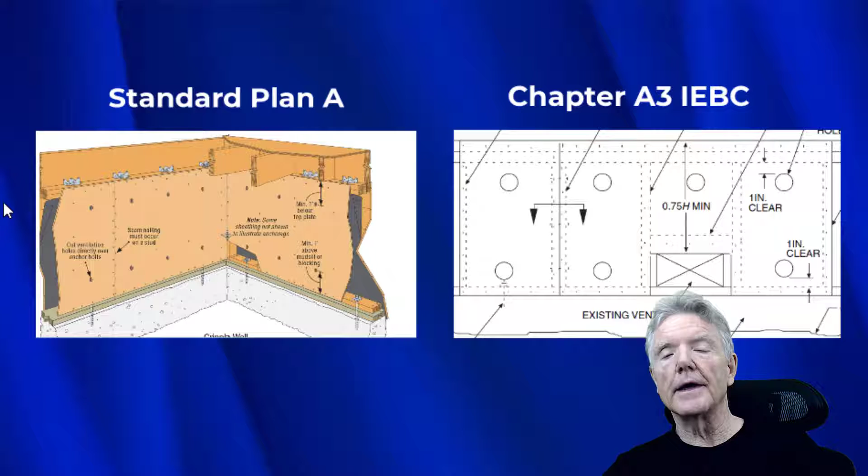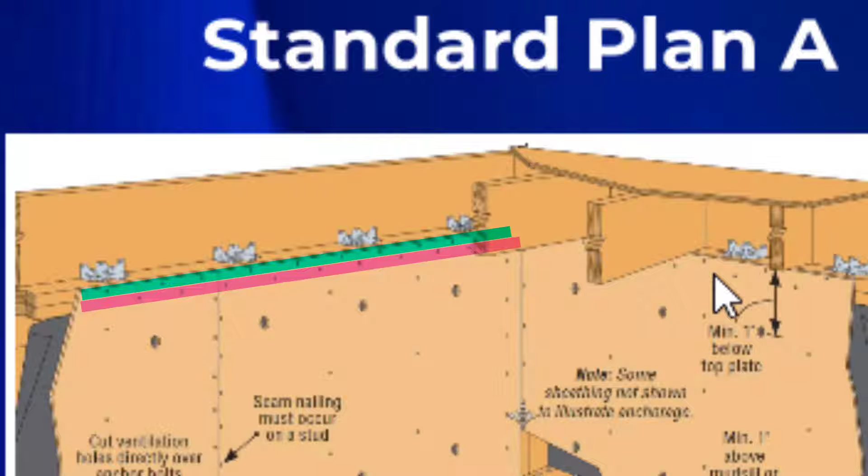This first way to do it, we see here in Standard Plan A. Here at the nails, we have nails up at the top, and we also have nails down at the bottom, all the way along the plywood. You see the nailing of the upper top plate and the lower top plate all along here. We see this in a few different guidelines, and we're going to look at every one of those in the rest of this video.

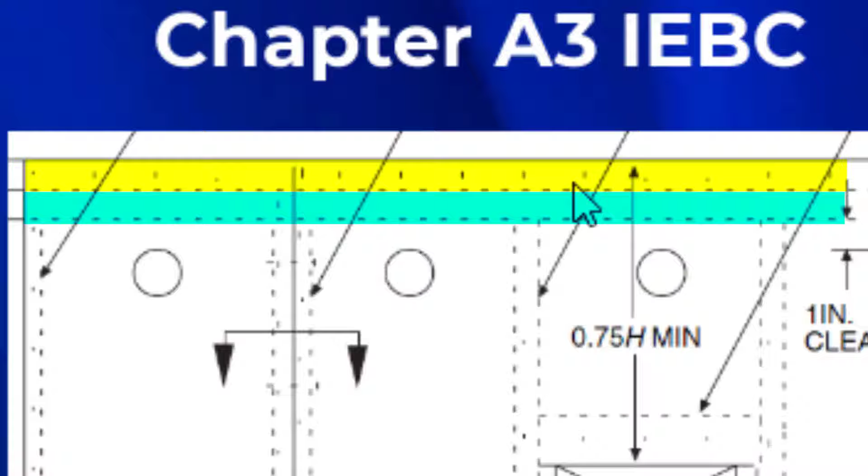Now here's another way to do it. This is from Chapter A3 of the International Existing Building Code. You see right here, there's nails in the upper top plate only. This section here is the lower top plate at the bottom, and this is the upper top plate. So there's absolutely no nails in the lower top plate. We're going to look at both ways of doing it and see which one is best.

Right now we're going to look at every single building code and seismic retrofit guideline until December of 2020, which is right now. So everything published before now, we're going to be looking at this particular connection, the plywood to top plate connection.

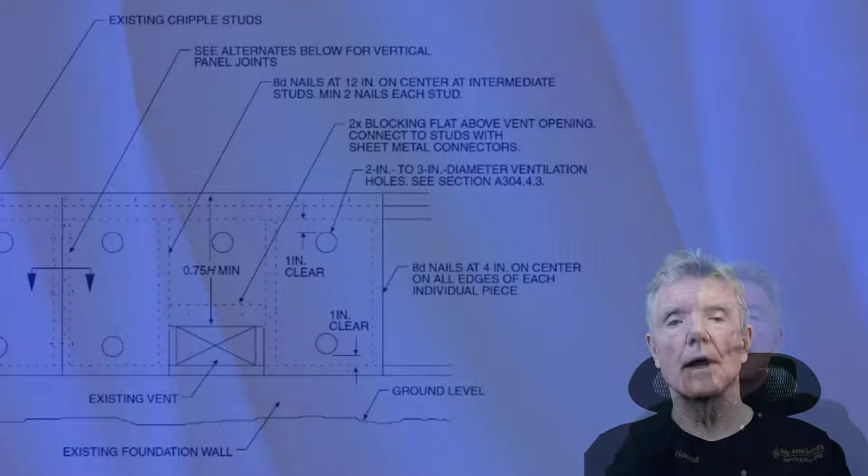This is the first instance I'm aware of where there was a construction detail that showed nailing of plywood in an official document. This comes from the Guidelines for the Seismic Retrofit of Existing Buildings, published, I believe, by the Structural Engineers Association of Southern California in the early 90s, quite some time ago. I was given a copy when I went there for a seminar in the mid-90s.

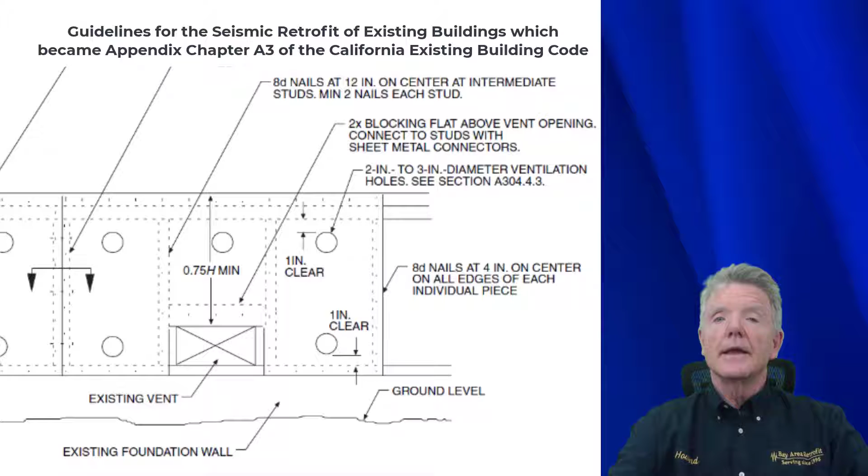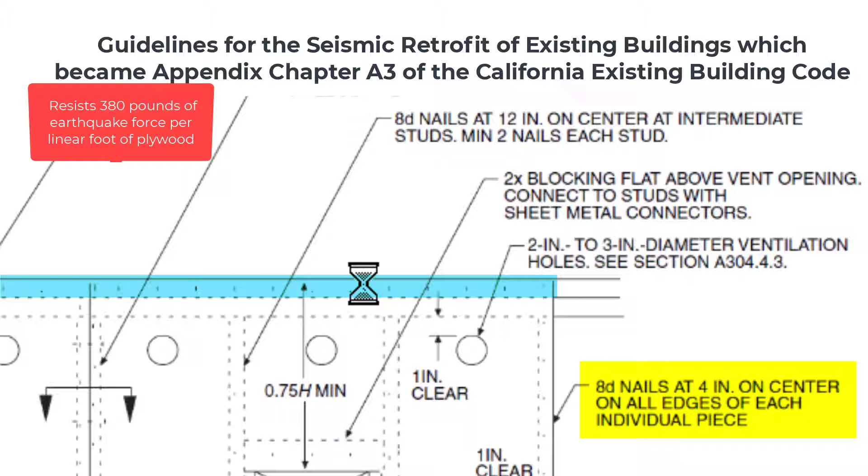The main thing here is we see 8 penny nails, 4 inches on center on the edges of each individual piece. So each piece of plywood will be nailed like this. The really critical thing to know is this edge nailing right here. You see these little dots - a dot here, a dot here, a dot here - all those little dots represent edge nailing onto the plywood.

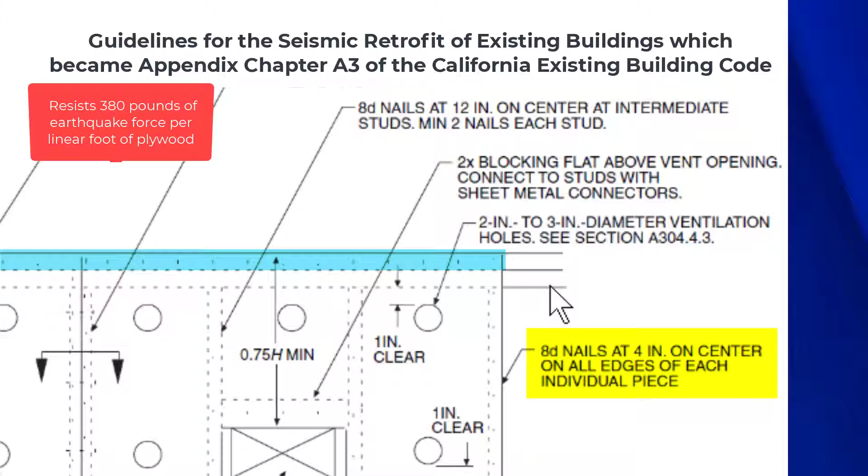That's the edge of the plywood, just like it says: all edges of each individual piece of plywood. Now there's two top plates here - there's the upper top plate right here, and then there's a lower top plate right here, and all the nails go into the upper top plate.

This is from the 2015 Special Design Provisions for Wind and Seismic, an American Wood Council publication, and it is a part of the building code for the entire country. So anything that applies here applies to all new construction. This is the basis of new construction in the building code.

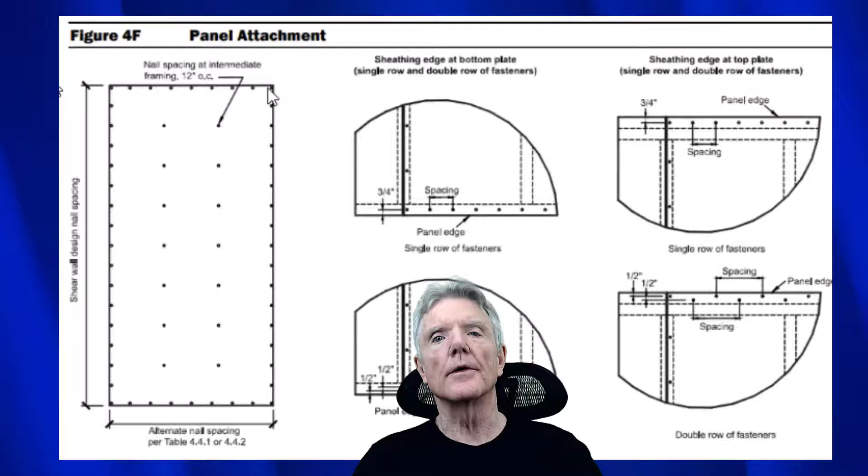Let me show you what it tells us here. So here we have the nailing along all the edges, just like we saw a little while ago. Here at the bottom, we also see the nailing at the bottom - it's spaced 6 inches apart, 4 inches apart, whatever. Main thing is it's here at the bottom. And then when you come over here, you have nailing again at the upper top plate. Remember, this is the lower top plate, this is the upper top plate.

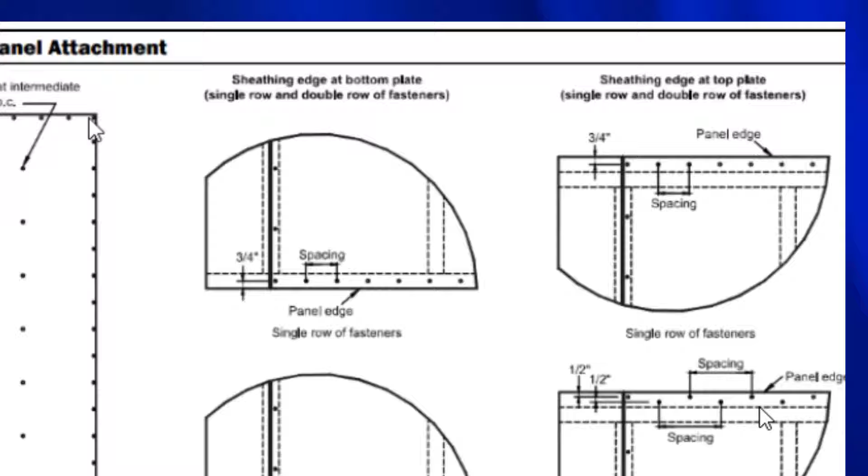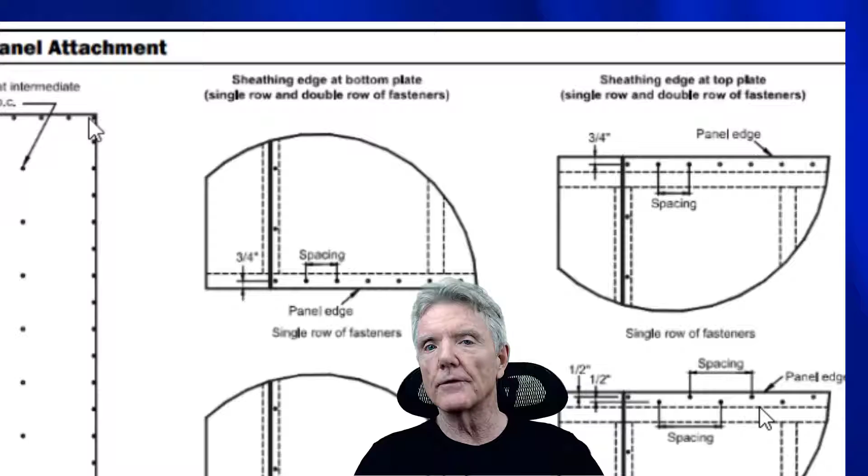Now, if you want to stagger the nails, that's fine too. You can go into the upper top plate - here's a nail here, here's a nail here, here's a nail here - and those can be spaced, let's say, 4 inches on center. But you can't put it here. So you can't come here and put one in, 4 inches over here and put one in, 4 inches up here and put one in. That is the way Standard Plan A and some other guidelines do it, and it is in contradiction to what is in the Special Design Provisions for Wind and Seismic.

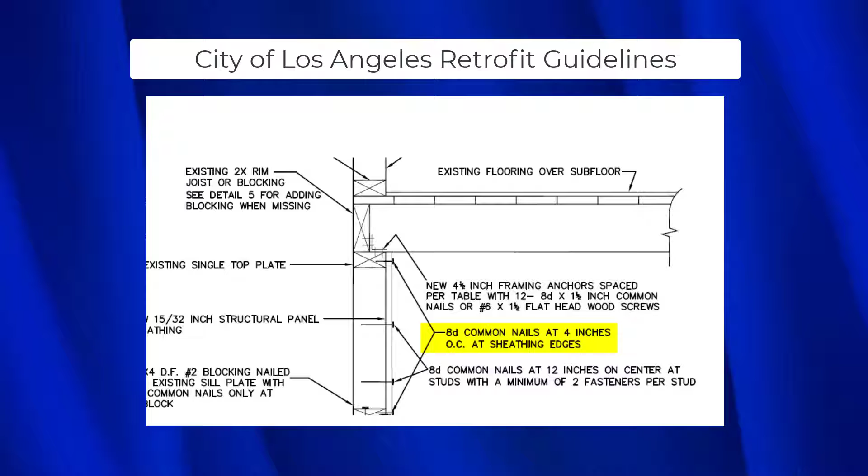So historically, this is the next retrofit guideline that came into existence in Los Angeles. You can see it has 8D common nails at 4 inches on center at sheathing edges. OC stands for on center, or apart, and sheathing is the same thing as plywood. This was intended to resist 380 pounds of earthquake force for each linear foot of plywood, just like we saw previously.

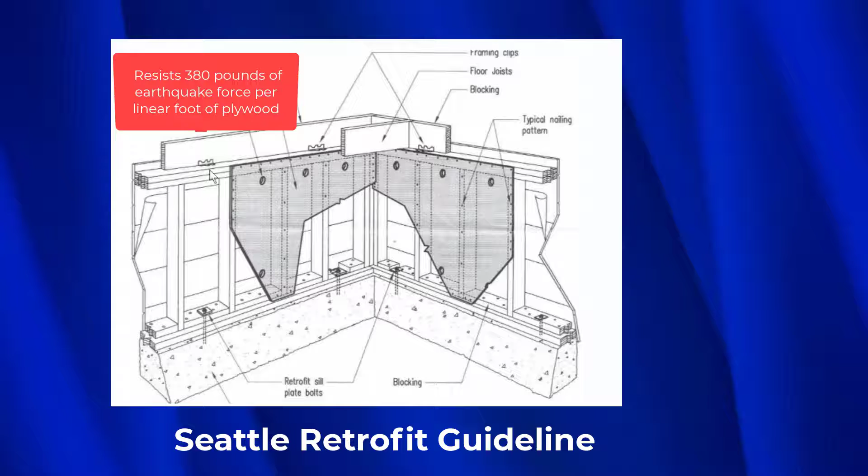This is from the City of Seattle retrofit guideline, and you can see here we have the exact same thing. We have the edge nailing along the upper top plate here and the upper top plate here. Even though I don't show that here, the nailing pattern is at 8D commons at 4 inches on center, just like the other guidelines.

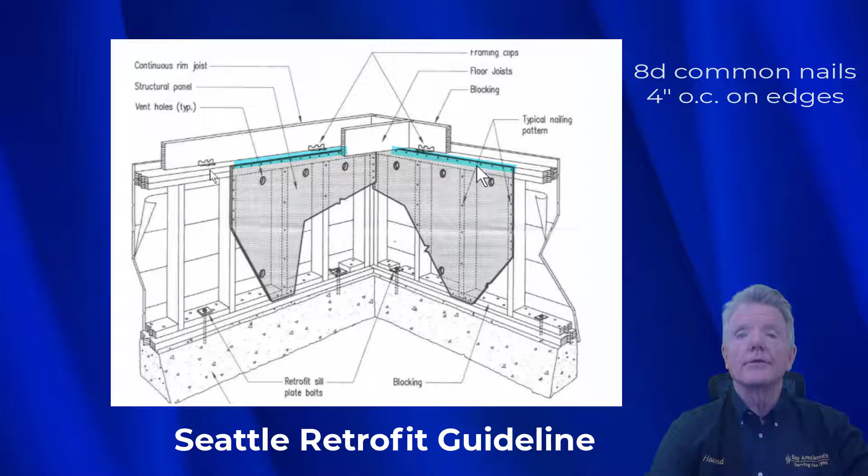This actually took the information from the original precedent of the California Existing Building Code guidelines for retrofit of existing buildings and made a new drawing, which I think is much better. It's much clearer because it shows the upper and lower top plate and the way it was nailed.

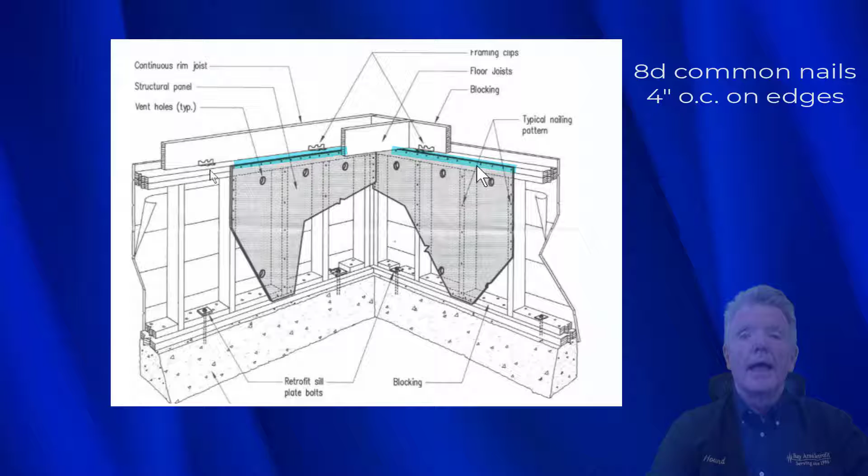It also shows the shear transfer ties. Notice the nails that go into the shear transfer ties in this direction, down into the upper top plate—they only go into the upper top plate, which is why these nails here are only going into the upper top plate as well. So this framing anchor, also called a shear transfer tie, is connected to the upper top plate, and the plywood is also connected to the upper top plate.

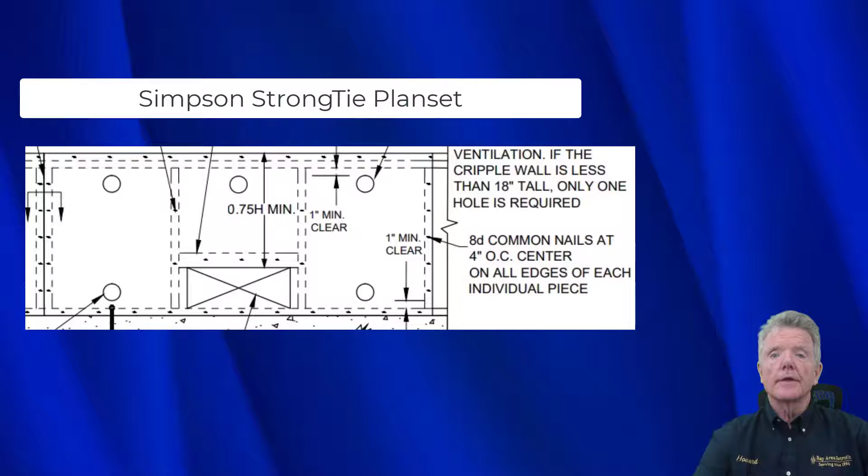We're going to see the reason for that when we actually take a look at the standard Plan A detail. Many people may not be aware of this, but the hardware manufacturer Simpson Strong-Tie also has a plan set, and it is just like all the other ones. As you can see, we have 8D common nails at 4 inches on center on all edges of each individual piece of plywood, and all the nailing is on the upper top plate.

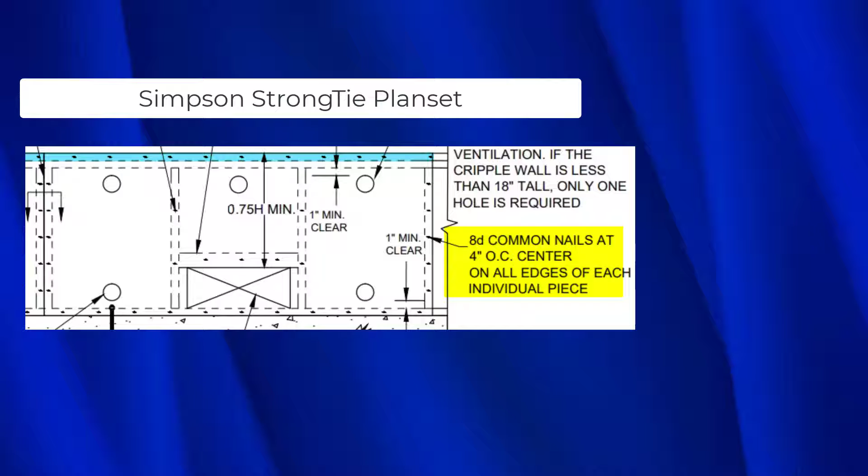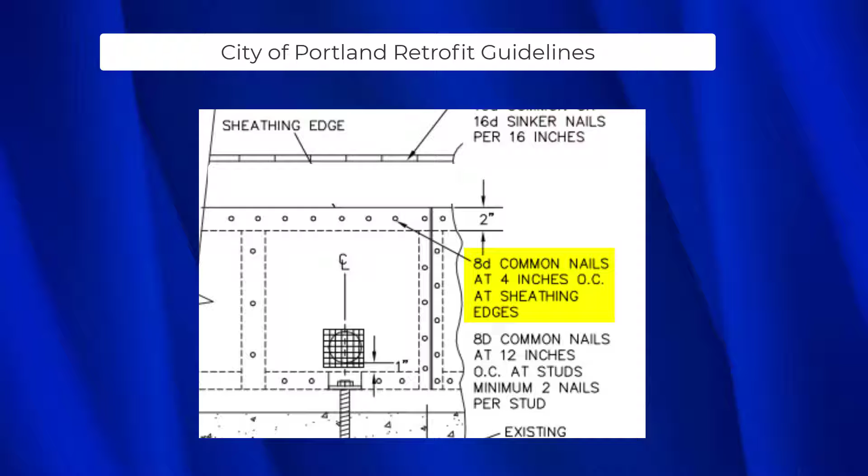Again, this is to resist 380 pounds of earthquake force for each linear foot of plywood. This is from the City of Portland retrofit guidelines, and this construction detail is not very clear—it was actually lifted from the Los Angeles retrofit guidelines, but it shows the exact same things. We have 8D common nails at 4 inches on center at the sheathing edges, and this again is a plywood nailing pattern supposed to resist 380 pounds of earthquake force for each linear foot of plywood.

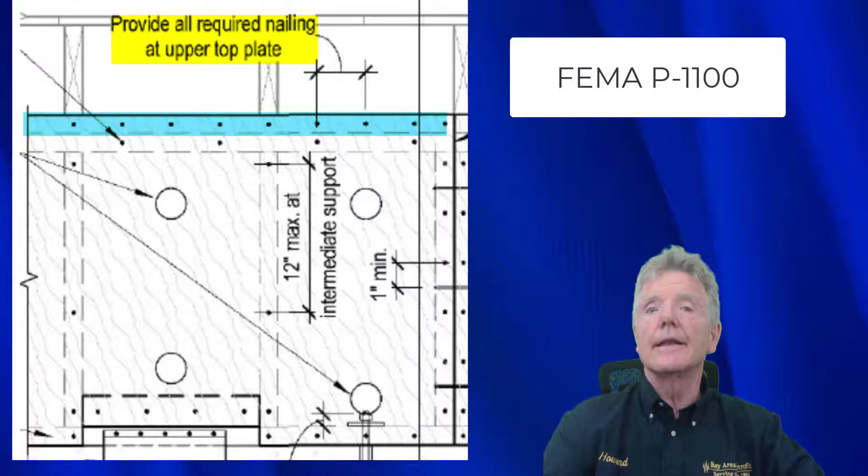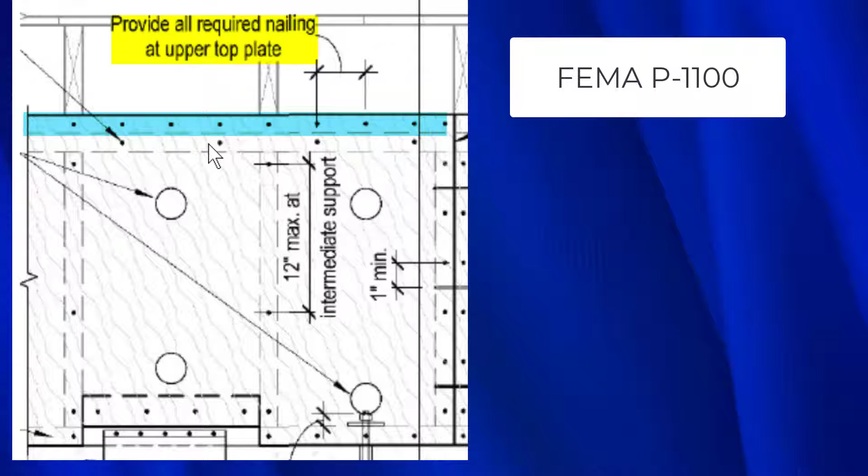You can see it very clearly here. It says provide all required nailing at upper top plate, and you see the nails right across along the upper top plate very clearly. There are a few nails here at the bottom—one at this lower top plate, one here, one here. It certainly won't hurt, but they're not required. So anyway, what you see here is what Jim Russell originally intended for Standard Plan A.

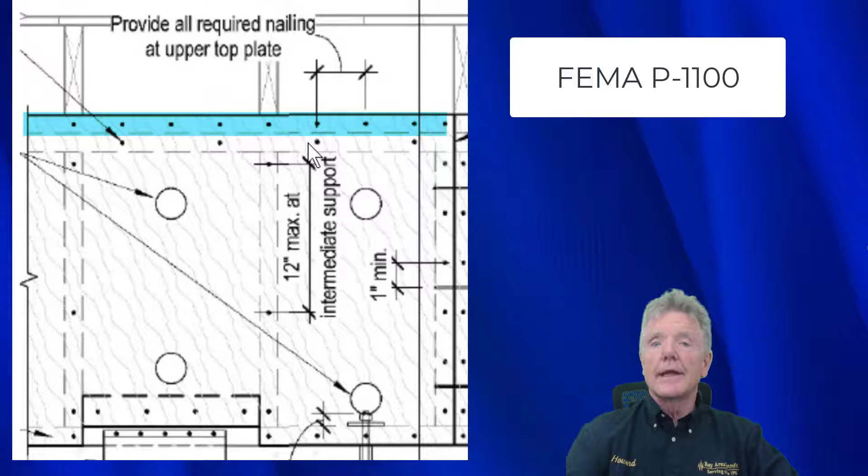As you probably noticed, all the retrofit guidelines ultimately refer back to Jim Russell's original work in the guidelines for the seismic retrofit of existing buildings as far as the plywood nailing goes. They all recommend 15/32 plywood, 8D nails, 4 inches on center nailing, and nailing into the upper top plate only. The shear walls can resist 380 pounds per linear foot.

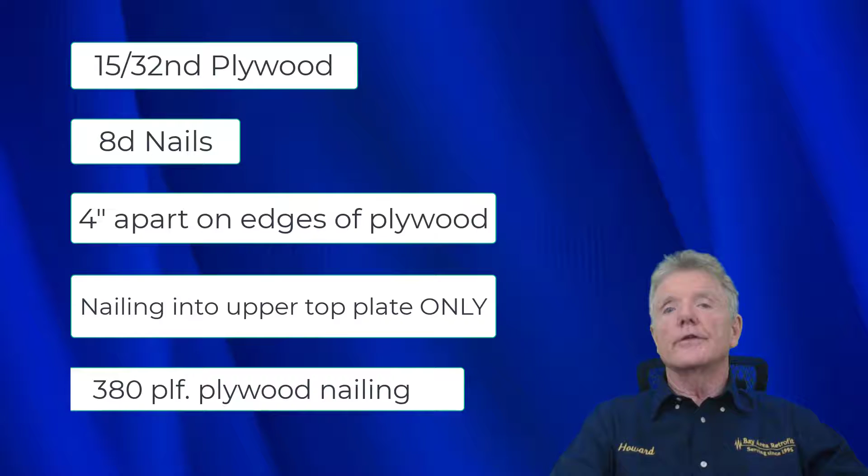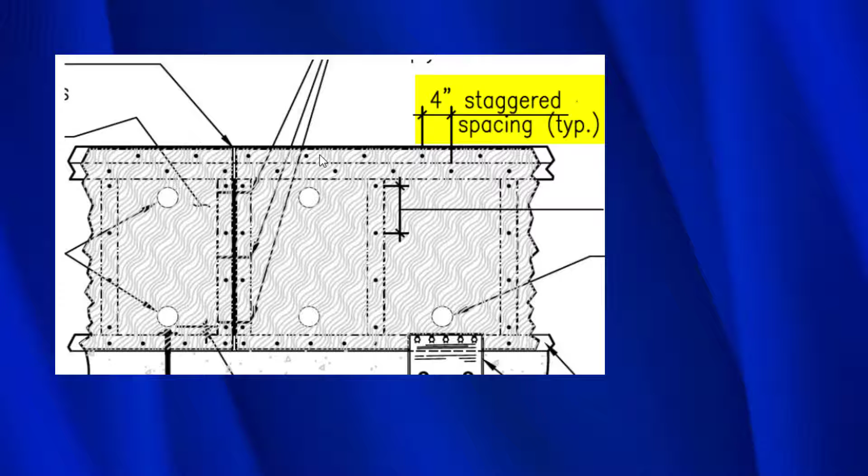So what you end up with is the edge nailing being 8 inches. We have 8 inches here to here, here to here, here to here. And when you only have 8-inch edge nailing, the capacity of the shear wall drops down to 190 pounds per linear foot. Remember earlier we saw the plywood is nailed at 380 pounds if you put nails 4 inches on center on the edges. Well in this case, they're only 190 pounds, which is a whole lot weaker.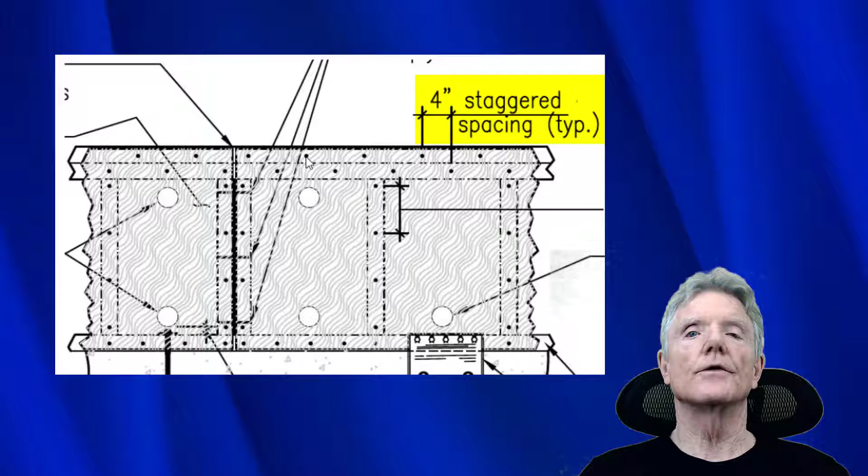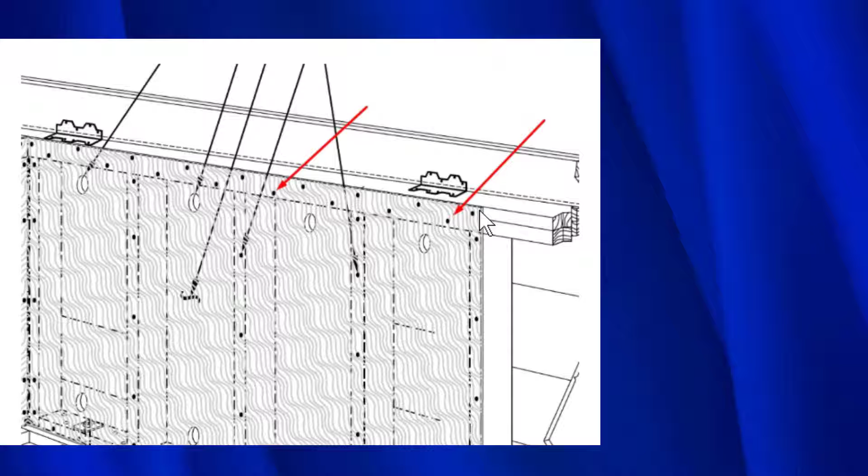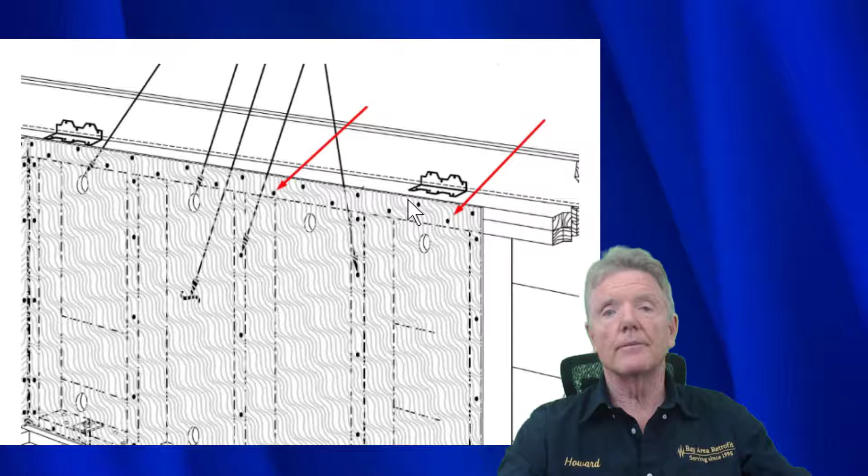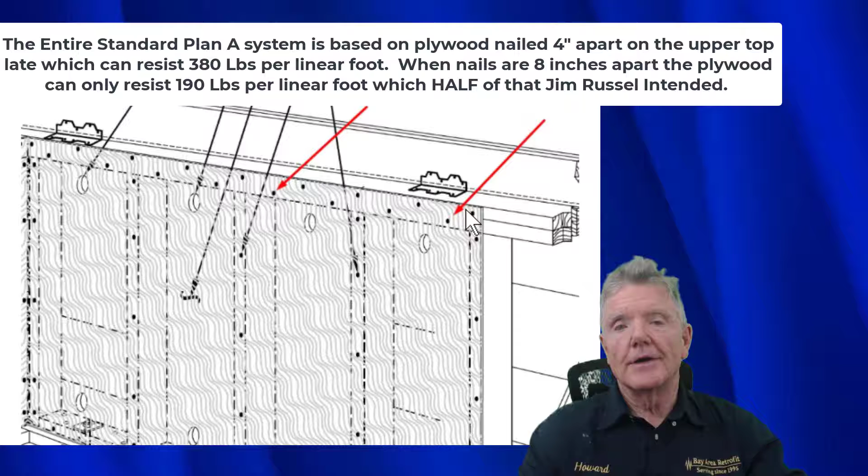Let me show you exactly why that's a problem. This is our upper top plate, and this is our lower top plate. You see how these are 4 inches apart along each plate. So here we have one, and one right here that's 4 inches, and one here, that's 4 inches, 4 inches, 4 inches. So in effect, along the entire upper top plate, you have a nail every 8 inches. Now the building code doesn't even have a table that recognizes shear walls nailed on the edges every 8 inches. But anyway, that's what we got.

So the way it would actually work is, this is a floor joist, and a floor joist is part of the floor - it supports the floor you walk on. What happens is when this slides this way, we want to keep that from sliding. So we take this piece of metal right here, called a shear transfer tie, and we nail it to the joist right here, and then nail it down here into the upper top plate. Now the upper top plate is only 2 inches thick, or 1.5 inches, usually 2 inches. The nails that come in here are 1.5 inches. So all the nails go into this upper top plate.

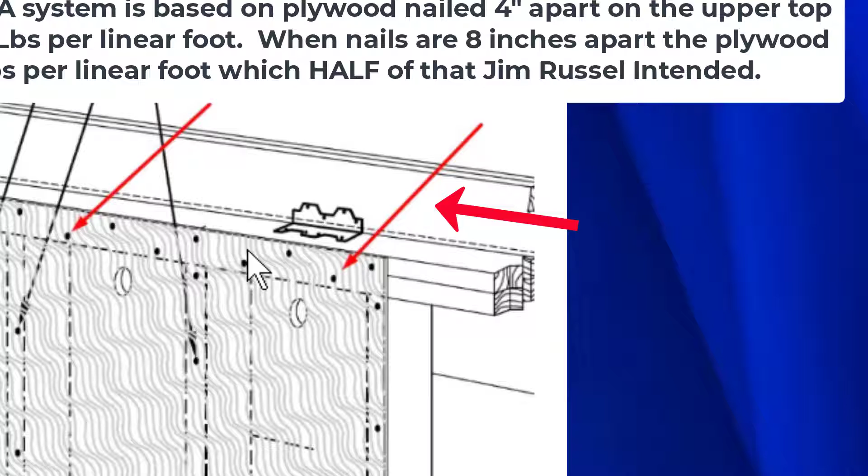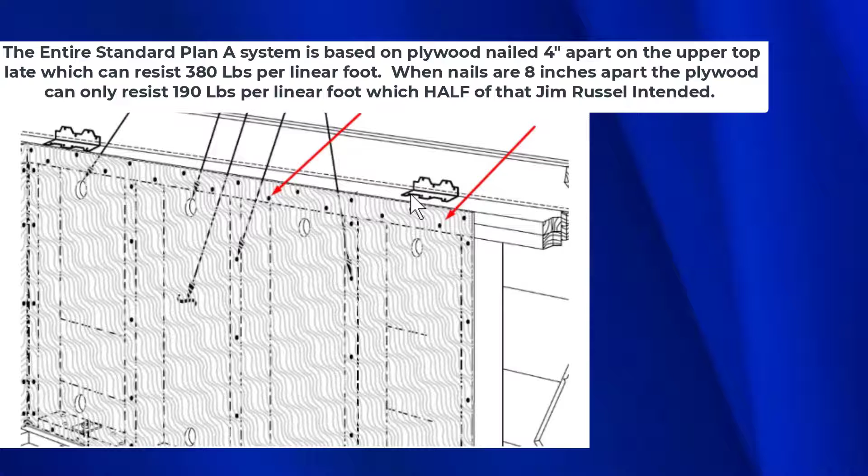So what that means is earthquake force comes this way, pushes on the shear transfer tie, that goes into the nails that again are only 1.5 inches. So that force goes into the upper top plate, it pushes it that way. Then that force goes into the nails that are also in the upper top plate. And eventually, when this piece of plywood pushes on the top like that, the bottom of it also pushes that way into the bolts. So these nails here on the lower top plate, they're not connected to the shear transfer tie, therefore they are not doing anything. So anyway, that is the problem with standard plan A.

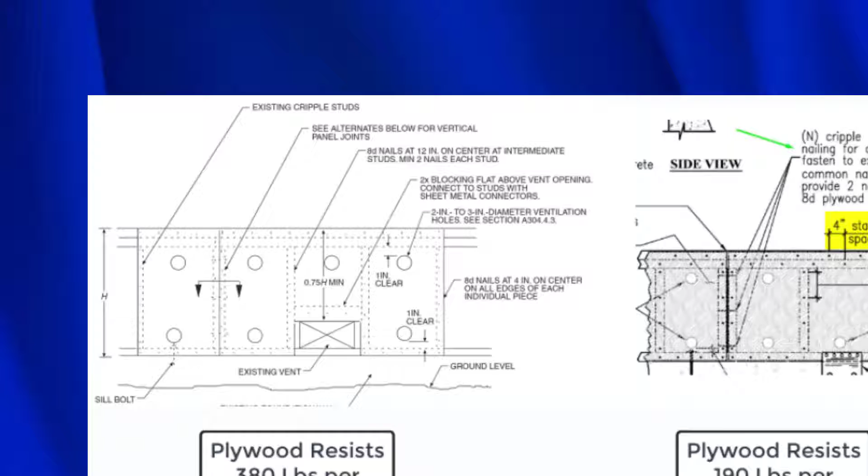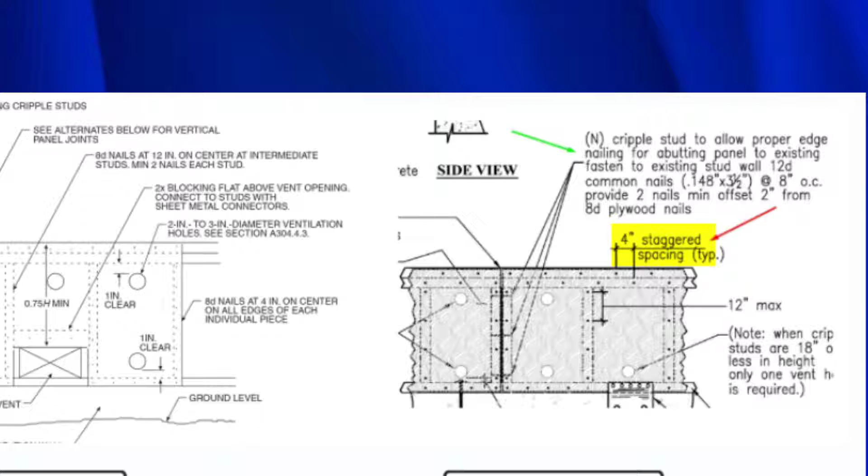Here's a good comparison for the two types of nailing. On the left, you see what you'd find if you use the special design provisions for wind and seismic, and the guidelines for seismic retrofit of existing buildings, and many other guidelines we looked at. On the right, you'll see standard plan A and two other guidelines mixed up with that.

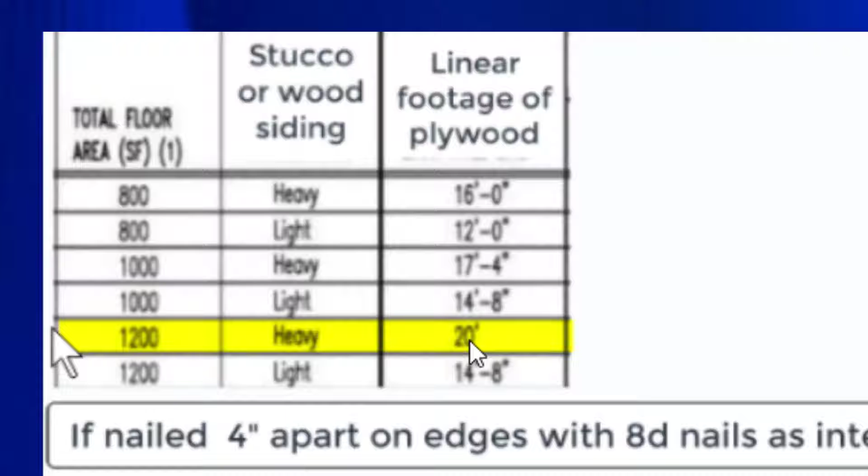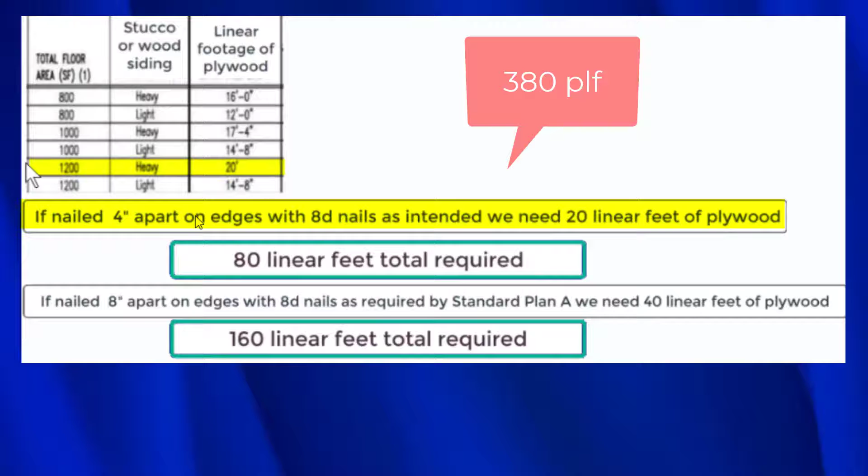Let's see what happens when we apply these nailing patterns to a standard plan A retrofit. This table right here is from standard plan A, and it tells us that if a house is 1,200 square feet, it's heavy construction, it needs 20 linear feet of plywood on each side. Now if it's nailed 4 inches apart on edges with 8 penny nails as intended, we need 20 linear feet of plywood. That's 4 inches on center on the upper top plate, as Jim Russell intended, as the special design provisions of wind and seismic recommends, City of Los Angeles, all those different guidelines we looked at. If those are used, we have 4-inch nailing on the upper top plate, we need 20 linear feet on each side because standard plan A was designed around a 380 pound per linear foot plywood nailing.

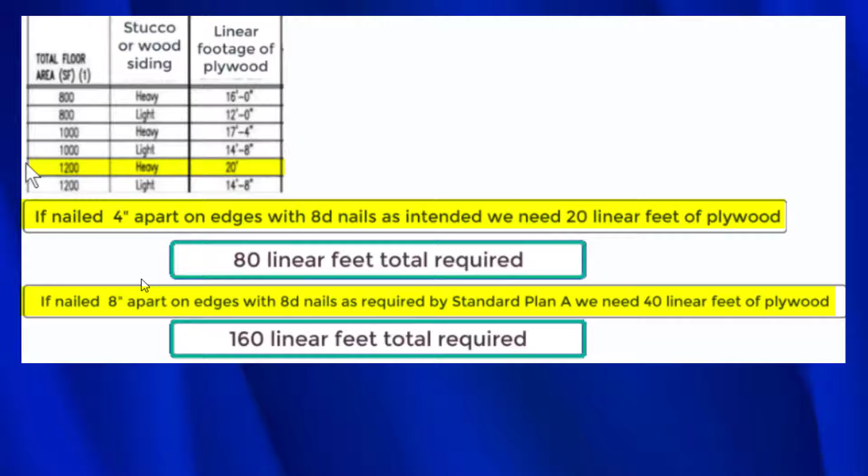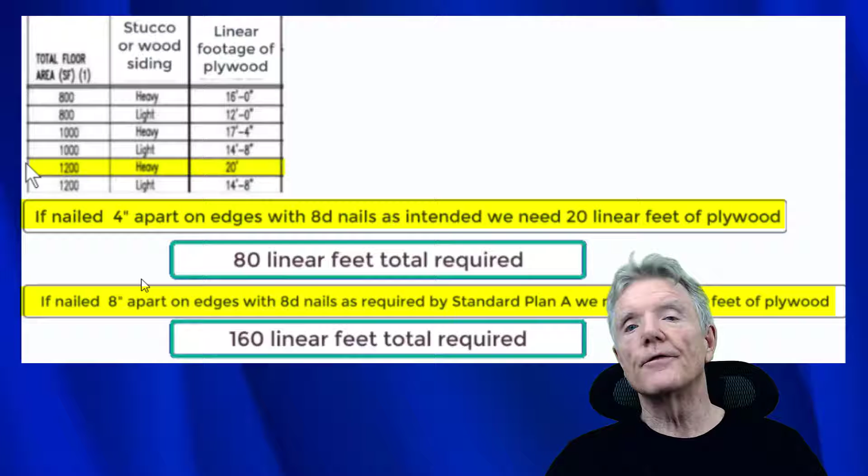On the other hand, if we use the standard plan A system, where it's nailed 8 inches apart with 8 penny nails as required by standard plan A, we need 40 linear feet on each side. So just as we saw, 8 penny nailing, 8 inches apart on the upper top plate alone only provides 190 pounds of earthquake resistance per linear foot, and therefore we need twice as much. So we need 40 linear feet on each side, which gets pretty expensive.

Here we see 2 identical floor plans for 1,200 square foot houses that are considered heavy according to Standard Plan A. The one on the left will be nailing in the upper top plate only, as we saw in all the guidelines we just looked at. On the right, we'll be nailing in the upper and lower top plates, just like we saw in Standard Plan A. Now this is what happens when we do that.

When we have the 380 pounds per linear foot nailing, we only need 20 linear feet of plywood on each side. So we had 20 feet here, 20 feet here, 20 feet here, and 20 feet here - just 20 feet on each side for a total of 80 linear feet.

Now if we nail into the upper and lower top plates, then we need 40 linear feet, because the plywood can only resist 190 pounds per linear foot. So here we need 40 feet, here 40 feet, here 40 feet, here 40 feet. As you can see, in order to meet the requirements that Standard Plan A has defined for us, we'll need to add approximately 20 linear feet of extra foundation over here. So clearly this system does not work.

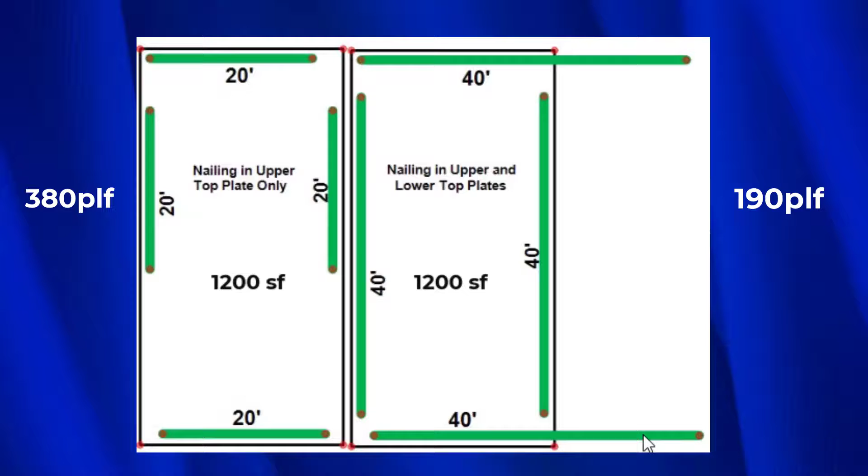The other guideline where we find the double top plate nailing is in FEMA DR-4193. As you can see here at the upper top plate, we have a nail every 8 inches. In the lower top plate, we have the exact same thing. So overall, the edge nailing is every 8 inches on this piece of plywood right here.

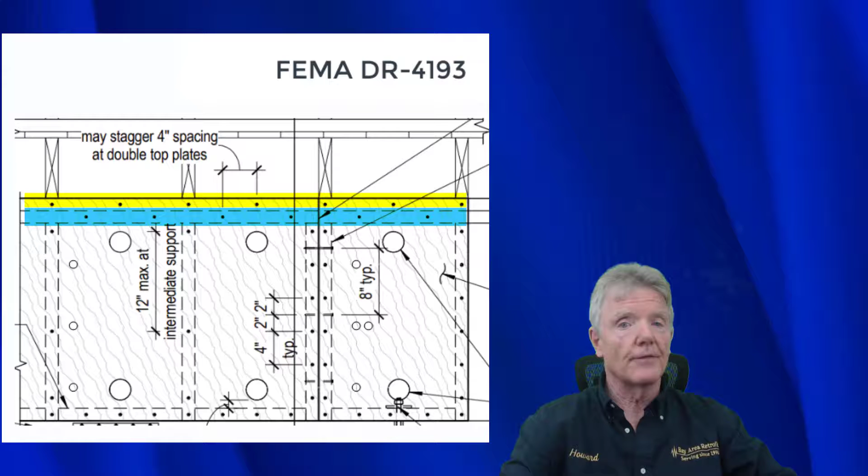The real reason this was even considered is because of Standard Plan A. Standard Plan A was a precedent - kind of like case law. In their mind, it had already been hashed out. A bunch of people had talked about it a whole bunch, and they finally figured out that this double top plate nailing was a good idea. That's why it's allowed here in FEMA 4193.

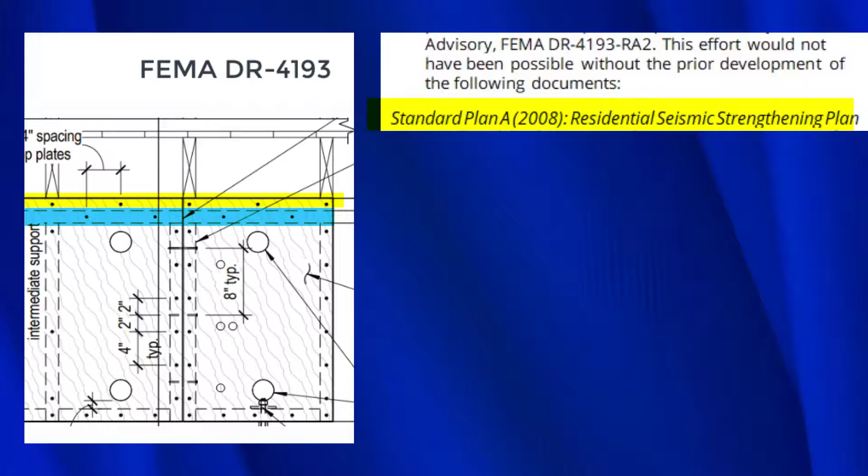It says that this effort would not have been possible without prior development of the following documents: Standard Plan A, Residential Seismic Strengthening Plan. So that is why we find this in FEMA 4193. It wouldn't be there otherwise.

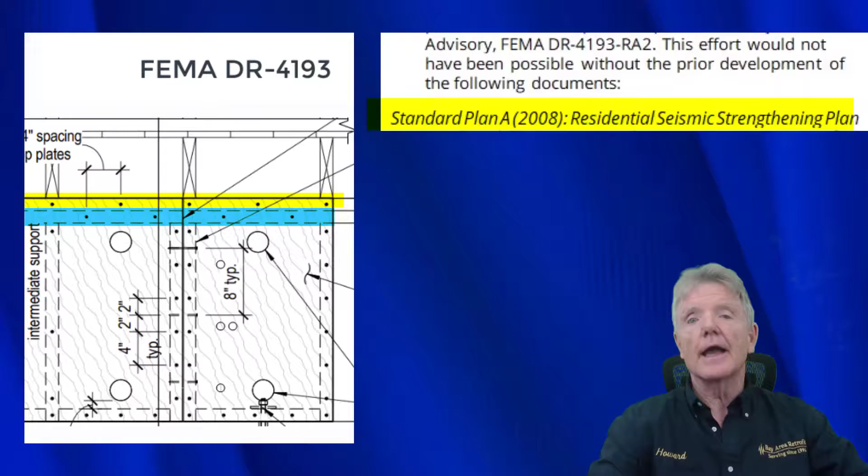So then the real question is, well, where did it come in Standard Plan A? What you see continually is that a certain standard will influence the development of another standard, which is what it should do. In this case, Standard Plan A was influenced by another document, but it was not a code document. It was not even a government document, and we'll see what that is.

So this is the final case where I could find nailing in the upper and the lower top plates. This comes from the Simpson Strong Tie catalog. This detail was in their publication from 2007 that was for homeowners for the retrofitting of their homes.

This must have been used by the people who were putting Standard Plan A together, because there's no other way that they could have come up with this. There's just nowhere - you don't find it anywhere. There's no code references. It's not in the California existing building code, not in the Los Angeles building code. There's no precedent for it.

So the only explanation I have is that. And the interesting thing is, I do recall at one of the meetings where the building official from San Leandro had talked about how he had hired someone who worked for Simpson Strong Tie, making their drawings like this for them. So either that particular person had already drawn a detail like this, or he was fully aware of it and would have also had a tendency to draw the detail like this.

So that's why this detail is in Standard Plan A, and it's the only time you ever find it. Actually, it's a little bit on the crazy side, because if you think about it, this was not put in because of any engineering expertise. When you get down to P1100, where there is some true engineering expertise, as well as what Jim Russell's original design back in the guidelines for retrofit of existing buildings and the California existing building code - those are all rational. But this one just came about because of some quirk, some human error.

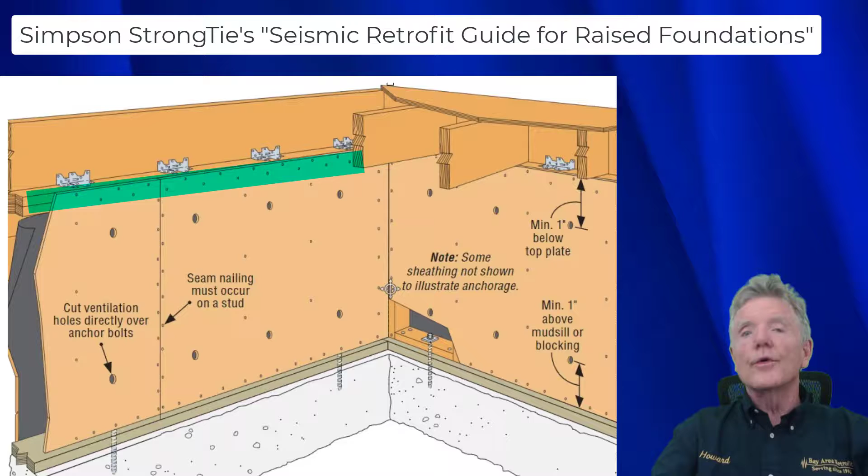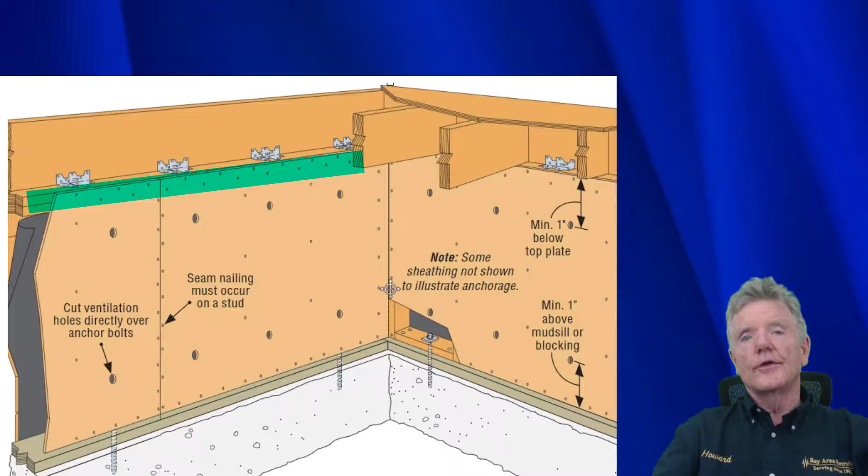This is just to show that even though it looks like scientists with white coats and microscopes, or they're writing codes, it's just human beings, and sometimes things like this just happen. This is one of the most unique nailing patterns I've seen while doing this research, and in this one, it has the nailing at the lower top plate only.

This comes from this document, Seismic Behavior of Level and Stepped Cripple Walls, a $7 million project financed by the Federal Emergency Management Agency. One thing I noticed right away is these weren't engineers, they're not contractors, they don't know anything about nail guns, probably give them a hammer and they'd hit themselves in the head. So these people didn't really understand what they were doing, but the government gave them a whole bunch of money to come up with this construction detail, and it's an interesting one.

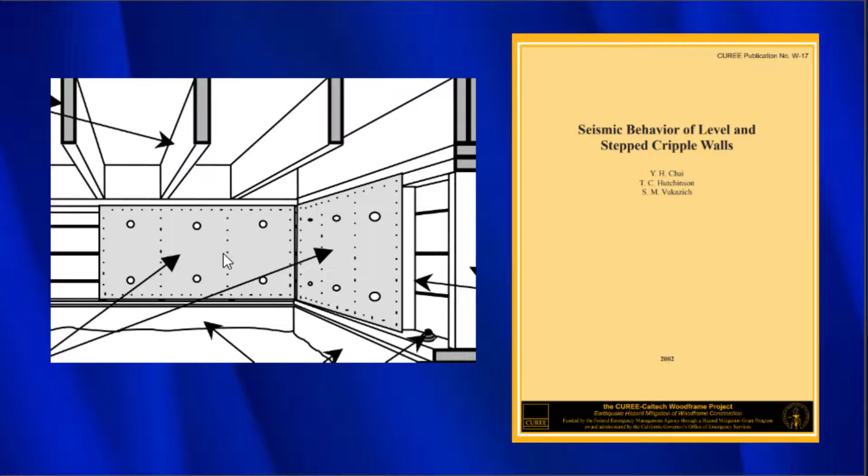So here, there's our upper top plate and our lower top plate, and as you can see, all the nailing is here in this lower top plate only. The other thing that's weird is this is called field nailing. Field nailing is supposed to be every 12 inches, so this should probably have 3 nails, and they ended up putting them every 6 inches. So that's obviously a guy who doesn't worry about nail cost or have a good understanding of what retrofit shear walls are all about.

The fact that you stuck it out with me probably means you don't have a whole lot to do with your time, or you're just really into this sort of thing. I wish I'd seen this sort of thing when I was younger.

We looked at all the different guidelines to see the different ways of nailing. Some say nail in the upper top plate, some nail in both top plates, somebody says nail only in the lower top plate. I hope I've convinced you that all the nailing should be done in the upper top plate, and the other ways of doing things should be ignored.

I think it's important to remember why this is such a crucial issue. When you have that upper and lower top plate nailing, the shear walls are only half strength. For example, Standard Plan A uses these, and Standard Plan A is used all throughout the Bay Area.

Every building department knows about it, every contractor knows about it. City of Oakland finances them, Berkeley finances them, California Earthquake Authority finances them. So Standard Plan A retrofits are all over the place, and as we can see, they're going to be half strength. And then there's the FEMA one.

Hardly anyone's used that, so it's not a big deal. And then finally, the Simpson Strong Tie catalog. That is of some concern because homeowners use it, and also people aren't aware, but we see these plans from engineers all the time.

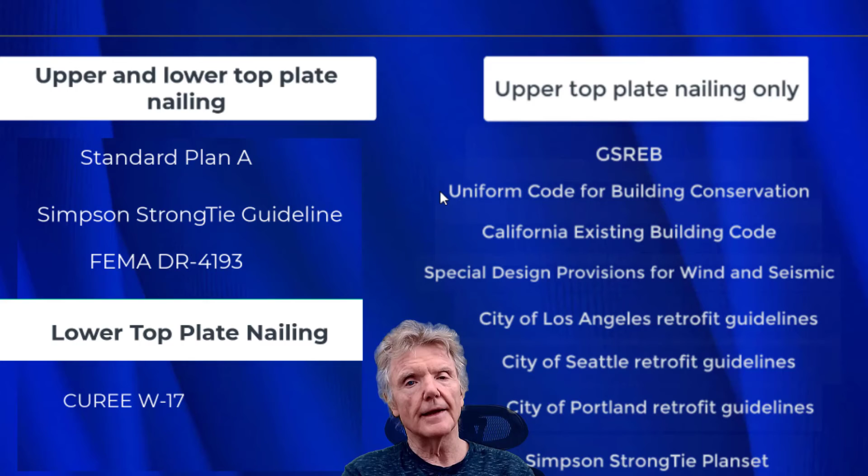But none of that matters at this point. We're just trying to make things better, trying to make sure you do a better retrofit in the future, and that you understand how top plates work. I'm sorry we had to go through every single guideline. I just really wanted to make a point and reinforce the fact that the upper top plate nailing is so important.